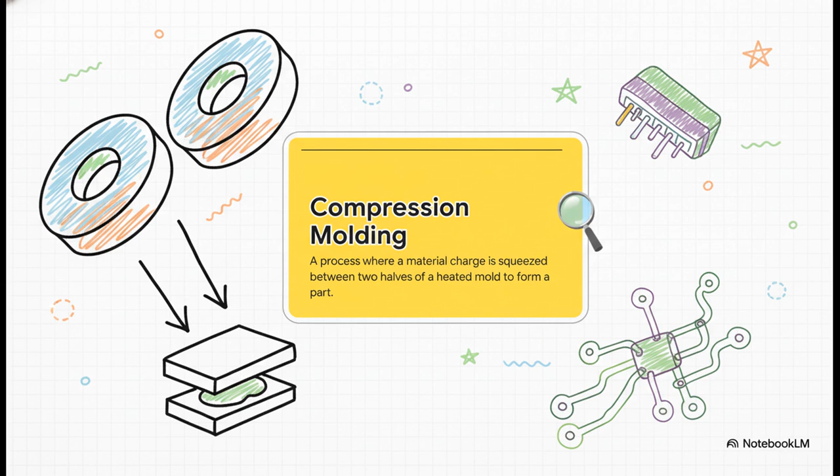So what is it really? Well, at its core, the idea is incredibly simple. You take a pre-measured amount of your material, we call that the charge, you place it into a heated mold, and then you just squeeze it. A lot. That combination of intense heat and immense pressure forces the material to fill every single nook and cranny of the mold, creating a super strong and durable part.

You know, the absolute best way to remember this process is to think about making waffles. I'm serious. You pour the batter, which is your material charge, into the hot waffle iron. You close the lid, which applies heat and pressure. It's the exact same principle, just with industrial-grade machinery and materials.

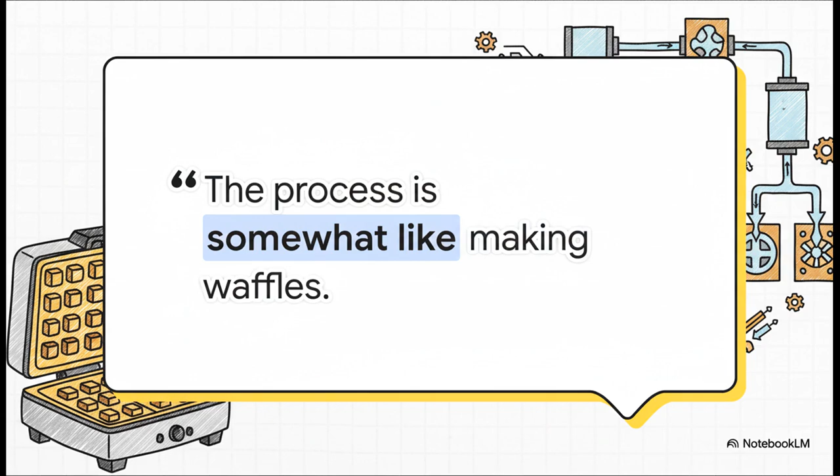Let's walk through the cycle. It breaks down into 4 simple stages. First, you place the charge into the lower half of the mold. Step 2, the upper mold half comes down, closes everything up, and applies pressure. Now for the magic part.

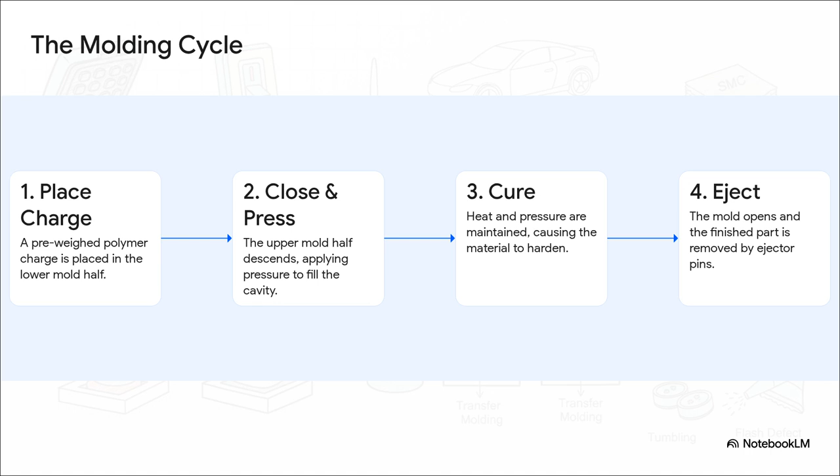Step 3, the cure. You maintain that heat and pressure, and it triggers a chemical reaction called cross-linking. This locks the material's molecules into place, making it permanently hard. And finally, Step 4, the mold opens, and the finished part is ejected. Simple as that.

So now that we have the process down, let's pop the hood and look at the key ingredients. Section 2 is all about the materials you're putting into the mold and the different types of molds themselves. This is where your decisions as a technician or an engineer really start to count.

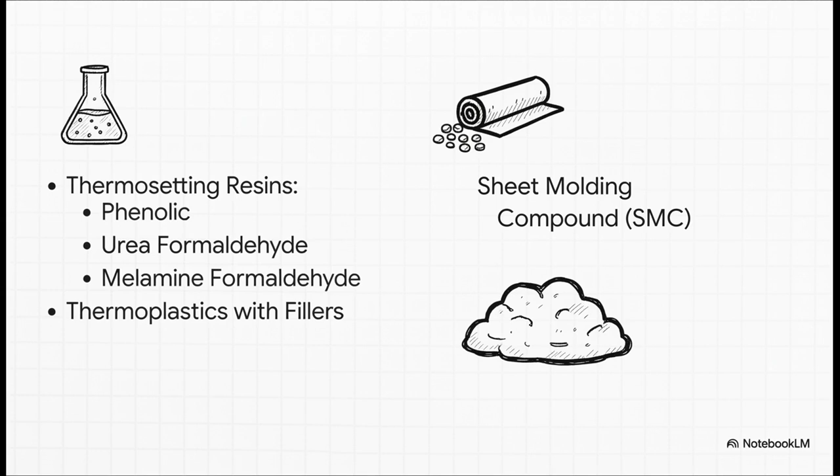When we talk about materials here, we're mostly dealing with thermosetting resins. And the name gives you a huge clue. Once you heat them and they set, that's it. It's a permanent chemical change. It's kind of like baking a cake. You can't unbake it. Things like phenolics and melamines are super popular because they're incredibly strong and heat-resistant. For larger structural parts, you'll often run into composites like sheet molding compound, or SMC, and bulk molding compound, BMC.

Now, for all you future technicians, this is critical. You gotta know your molds. First up is the open flash mold. It's a bit forgiving. You can overload it slightly, but that extra material squeezes out as waste, which we call flash.

Then you have the fully positive mold. This one is a total perfectionist. The material charge has to be precise. No extra room means you get a very clean part with almost no waste. And you guessed it, the semi-positive mold is that best of both worlds option, a nice compromise between the two.

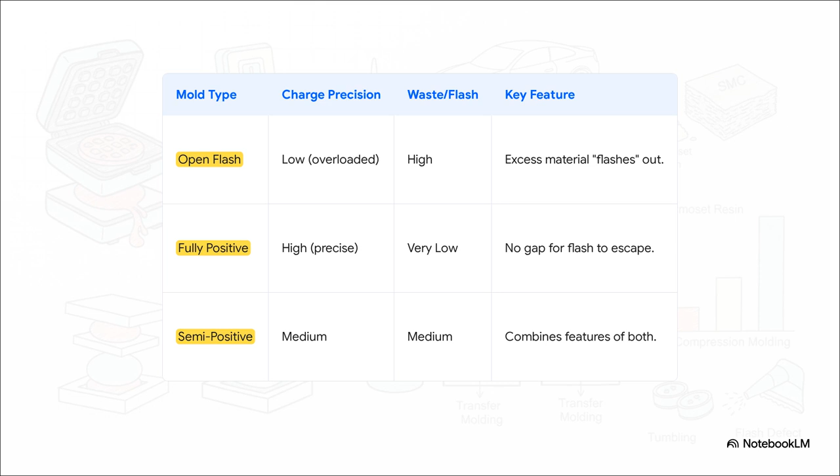Okay, so compression molding is fantastic for strong, simple parts. But what if your part isn't simple? What if you need to create something with lots of intricate details, or maybe embed some delicate metal inserts inside? Well, that's where our next process, transfer molding, comes into the picture. It's a very clever variation.

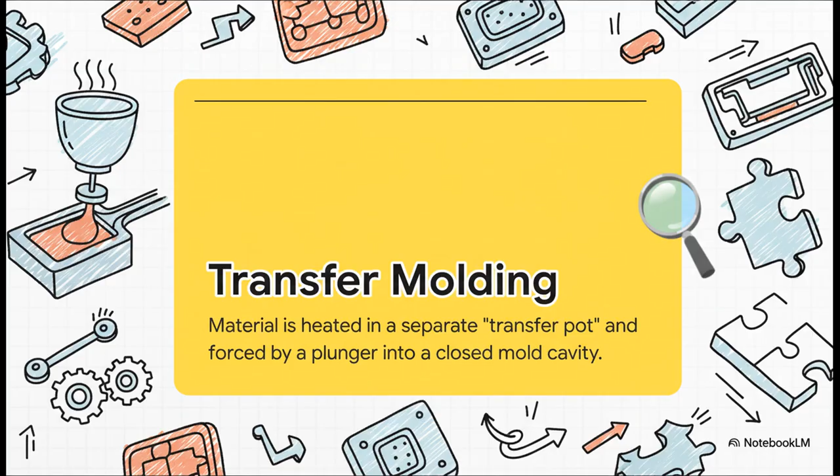Think of transfer molding as the clever cousin of compression molding. It uses the same basic principles of heat and pressure, but it adds an ingenious twist to get around some of those limitations. And the whole thing hinges on one key difference: where the plastic starts its journey. And here it is. This is the single most important difference to remember. In compression molding, you put the material inside an open mold.

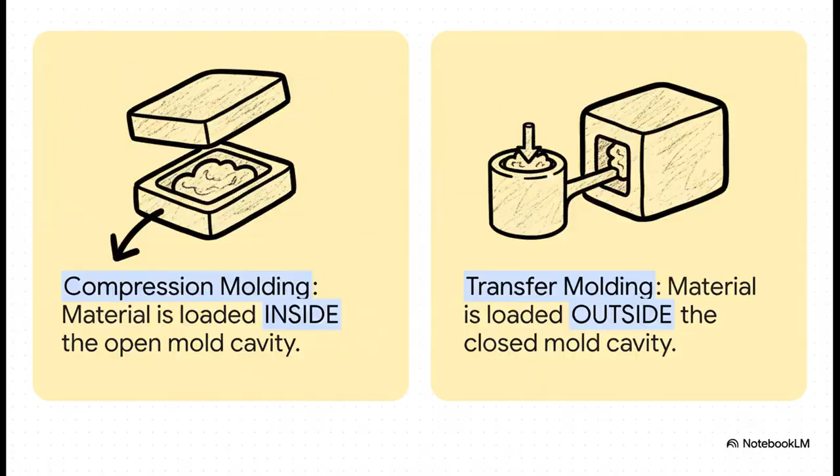With transfer molding, the mold is already closed, and you load the material outside the mold in a separate chamber, and then transfer it in. It seems like a small change, but believe me, it makes a world of difference. So why is this so important? Well, let's look at the cycle.

First, you put the charge into that separate transfer pot. Then, you heat the pot to get the material nice and soft, almost like a liquid. Next, the transfer. A plunger forces that soft material through channels and into the closed mold. Because it flows in so gently, it's perfect for creating complex parts with fine details. And it won't disturb or damage any delicate inserts like wires that you've put in the mold. Then, it's the same old story: cure and eject.

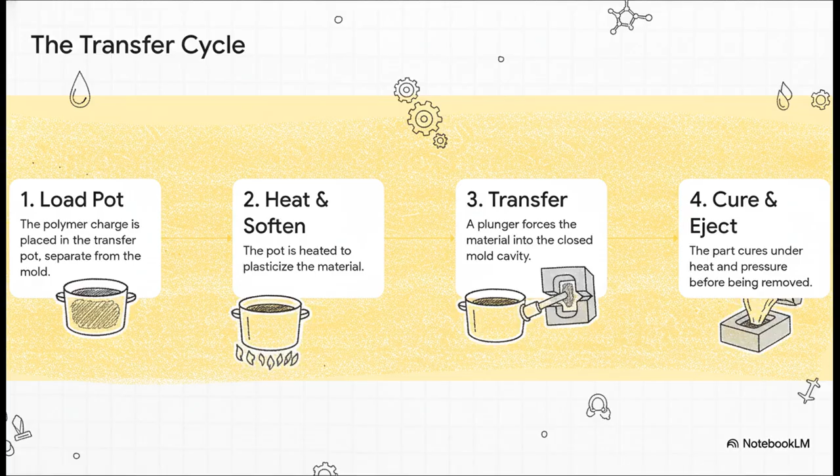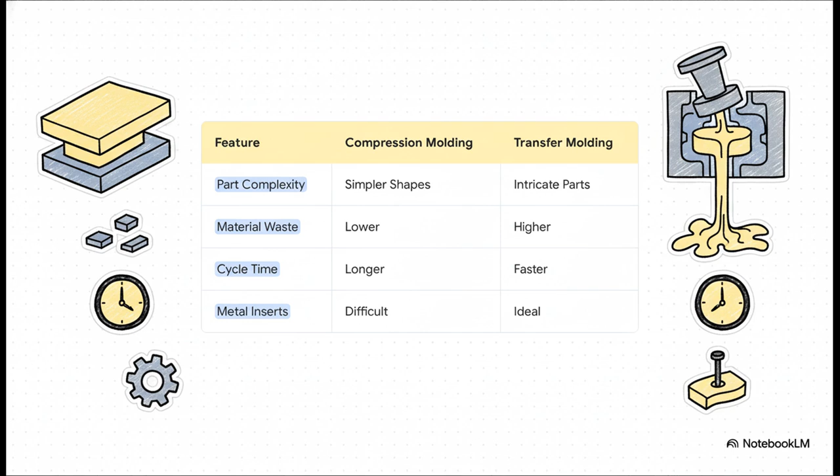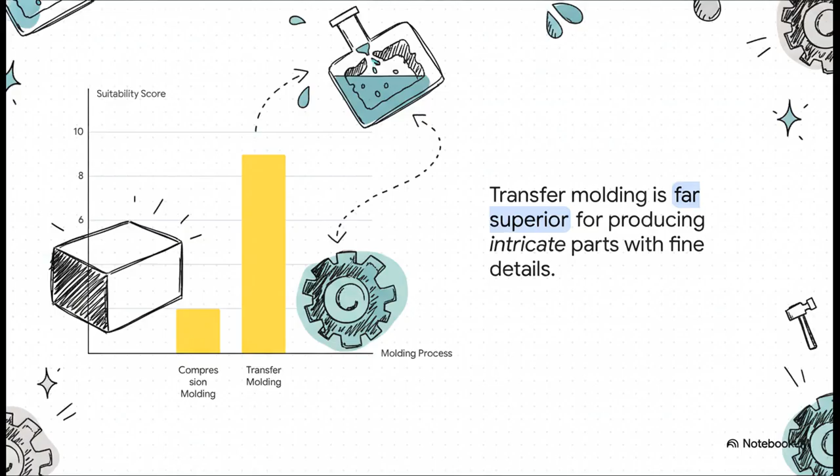All right, that's enough theory. Let's bring this all back down to earth, to the real world. We'll look at some everyday products made with these processes, and then we're going to tackle one of the biggest challenges you'll face on the job: product defects. I can almost guarantee you've used a compression molded product today. That sturdy handle on a cooking pot, the electrical socket on your wall, those tough melamine plates, all classic examples of compression molding's strength and durability at work in the real world.

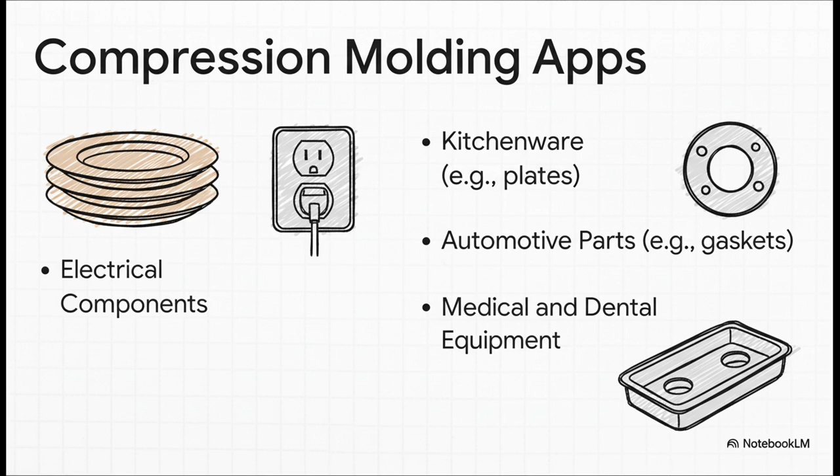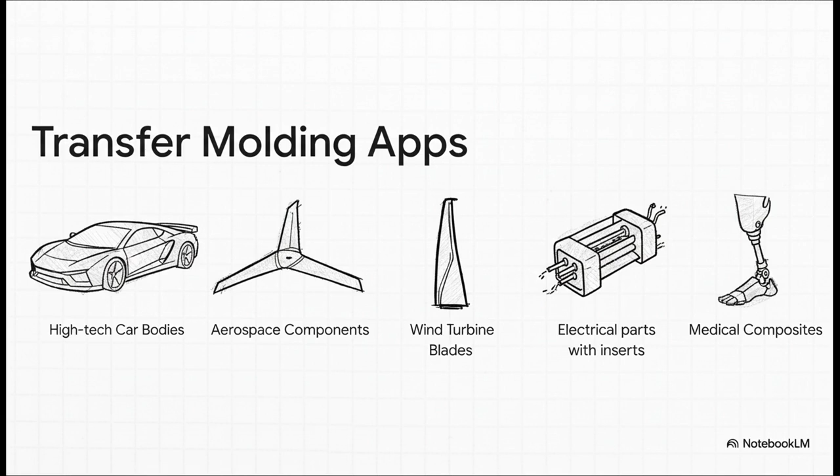Now, when it comes to high-performance, high-stakes applications, transfer molding is the star of the show. We're talking aerospace components, parts for wind turbines, high-tech car bodies, and especially things like electrical components where you have delicate wires embedded right inside the plastic. In these cases, precision is absolutely non-negotiable.

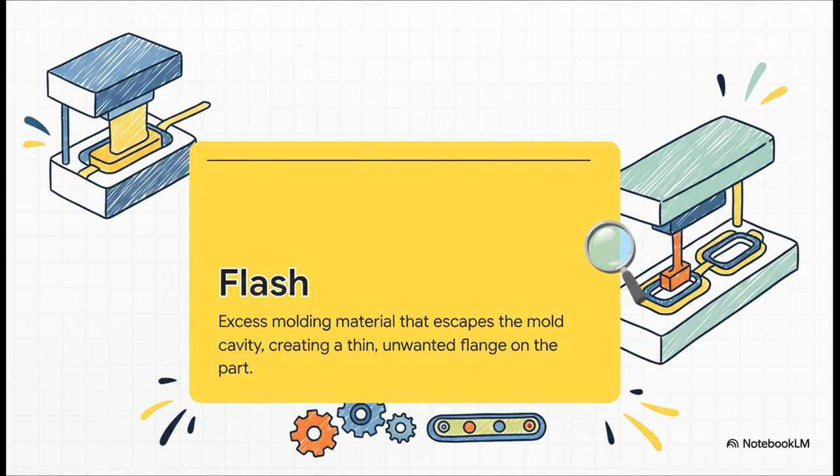Okay, let's talk about one of the most common problems you're going to face as a technician: defects. And the number one culprit is usually flash. See that little thin web of extra plastic that squeezes out where the two halves of the mold meet? That's flash. It's annoying, it's wasteful, and you've got to deal with it. But don't worry, we've got ways to fight back against flash. Two of the most common methods are tumbling and blasting.

Tumbling is pretty low-tech. You literally just tumble the parts against each other in a big basket, and that brittle flash just breaks right off. Blasting is a bit more sophisticated. You shoot a stream of fine particles, and this is cool, sometimes it's crushed walnut shells, at the part, and it abrades the flash away without hurting the main part.

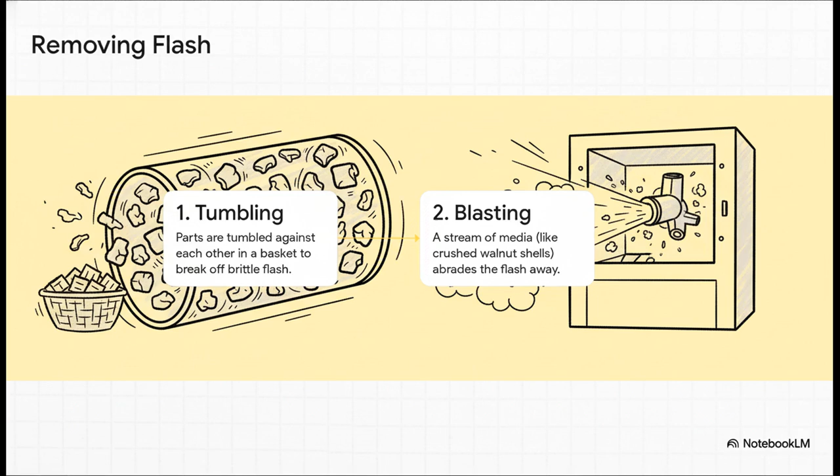Phew! Okay, we have covered a lot of ground, so let's pause and just boil it all down. Section 6 is all about your key takeaways. These are the absolute essential concepts that you need to lock in. Here are the 4 big things to remember. Number 1, compression molding is your waffle maker, great for strong, simple thermoset parts. 2, transfer molding is the clever variation, transferring material into a closed mold, which makes it perfect for complex parts.

3, the biggest difference is where you load the material, inside versus outside the mold. And 4, your choice always comes down to a trade-off between part complexity, material waste, and cycle time. And now, the torch gets passed to you. You have the foundational knowledge. You know the how. The next step is to take this and apply it to innovate and solve real-world challenges.

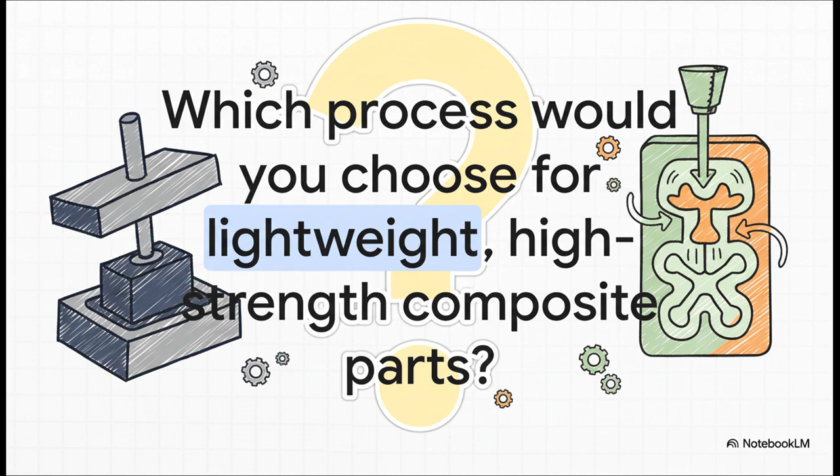So, I'll leave you with this question to think about. To design that next generation of lightweight, high-strength parts, which process would you choose and why? The possibilities are all yours.